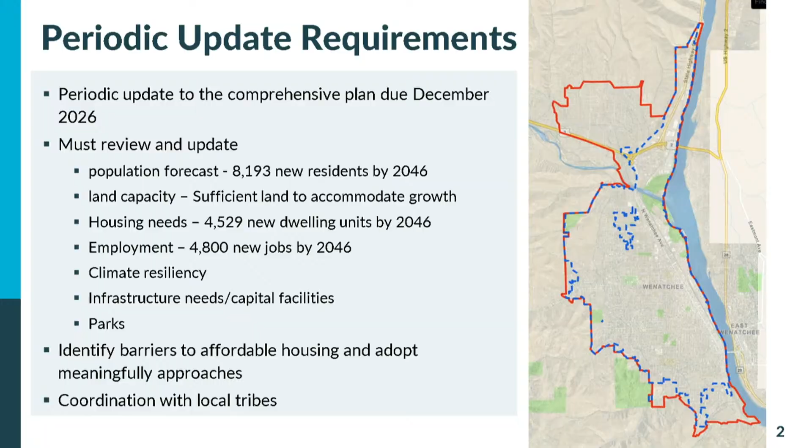We're also required to coordinate all these efforts with the tribes, and we're working towards that as well. We've been working since the beginning of last year on all of this, and we're currently in phase 3, drafting the comprehensive plan elements. We have a draft environmental impact statement that will go out in a couple of weeks, and we'll be holding an open house in May with those draft documents ready for public review. We'll continue going out to talk to folks and meet with you and the Planning Commission as we work through each of these.

At this point, I'm going to step aside and let Dave from Parks do his presentation, and then I'll come back and pick up the conversation on housing and other related issues. Thanks, Steve. You bet. All right.

Good evening, everybody. We're fortunate to have an adopted standalone plan, Parks, Recreation, and Open Space. It's 253 pages—I thought we'd go through all the pages tonight. We've got a couple hours, so lots of pictures, piece of cake. That was adopted in 2023, and by the end of this year we'll be about halfway through it, so we're able to incorporate a lot of that information into this comprehensive planning process.

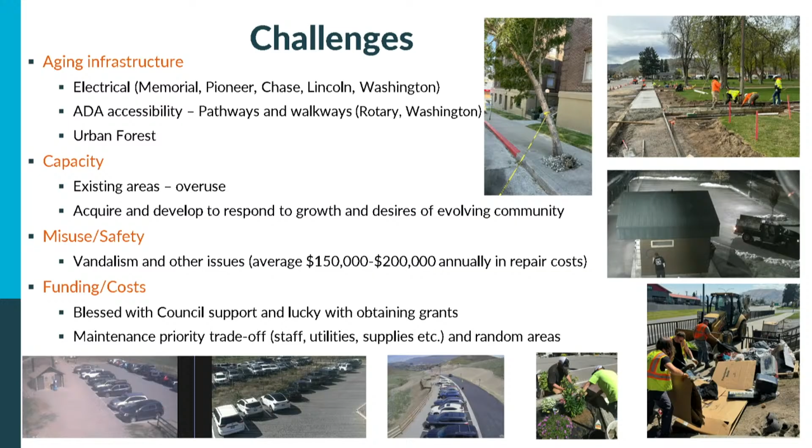And we'll cover that here a little bit. We may only have a certain amount of money and we have all these facilities we have to maintain. What are the priorities? Are we going to maintain the streetscape down Wenatchee Avenue, or are we going to maintain Lincoln Park, for example? But jumping into our PROS plan and ahead to chapter 4.

This chapter really talks about our assessment process. We looked at a variety of recently adopted plans when we developed this, and had a year's worth of meetings and surveys and did polls and trend analysis of what's happening out there, boiled all that down into the next section, which is the goals and objectives. But we did take a look at level of service and areas of deficiency.

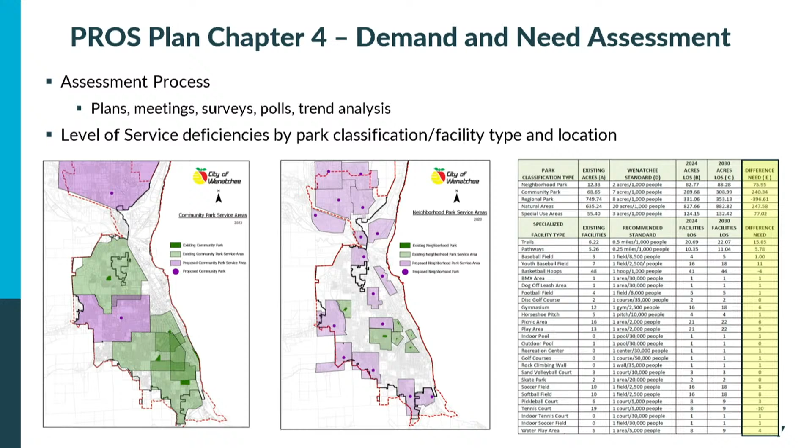And then it goes all the way down into specific facilities. That's the table on the right-hand side. So numbers of various types of facilities that would be contained within those parks to meet the growing demand as we move on into the future. You can see the 2030 need on each of those, and then the difference that we need to address.

Moving ahead to chapter 5, that's our goals and objectives. We call it the guiding framework. So it's goals, objectives, and strategic actions. Those goals are in five goal areas. This talks about climate resiliency, forestry, all that good stuff that Stephen mentioned is included in there. Forestry is in there as well, but broken out into those five areas.

Within those five areas, we have 24 objectives within each one. And then within those 24 objectives, there's 178 specific strategic actions to accomplish those goals and objectives. Those are the steps, and that could be anything like doing ADA accessibility at Pioneer Park, to the electrical at Memorial Park, to needing more picnic shelters or tables.

And then finally in chapter 6, this includes our capital investment plan, our capital plan. So all the projects, all 54 projects that are within the capital plan, have been rated on each of those criteria that you see there. Those criteria came about through the public input process, and those were the priorities that the community had. So health, safety, welfare in the park, that was kind of their number one priority, so that got a weight to it. Each project was scored and weighted based on those things to determine the actual list of priorities for our park projects.

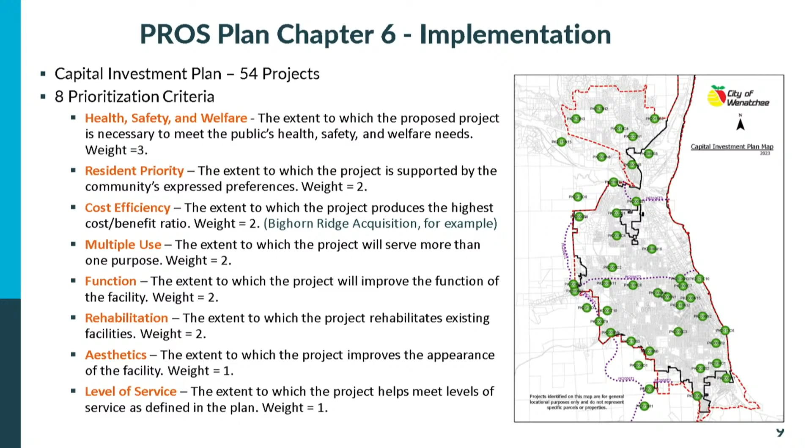Doesn't mean that we can't do a project, say that's ranked number 8 or 9, before you do project ranked number 1 or 2. If funding comes available for one of those lower projects, then that bumps up the list. That's kind of how that works. But it at least gives us kind of a roadmap of things that we want to try to accomplish.

And then also beyond the project cost, that's just dealing strictly with park stuff. We also have maintenance and operation to consider. We have formulas for maintaining and operating these parks based on the traditional park space you would see. Granted, some things take more maintenance than others - a splash pad takes more maintenance than an open field. So there are some factors that we do take a look at.

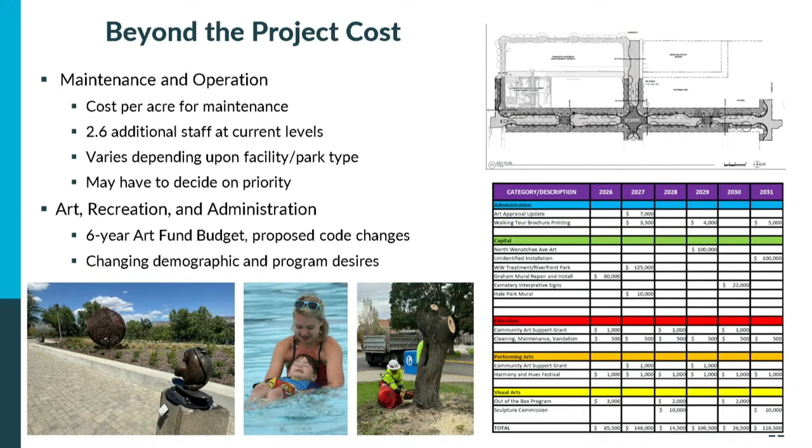Some of them, like Metropolitan Park District, we did some polling a couple of times. We did a conservation finance study twice over the last 5 to 10 years. The ballot measure polling did terribly - so bad that the group we did it with said they wouldn't even touch a ballot measure on this because it would fail miserably if brought out. What we did find is people love the parks, they love going to them, they want to have them, they just don't want to be taxed again for them.

Another one that stands out is impact fees - we have no development impact fees for parks. I've had those in a number of other communities I've worked in, or dedication requirements. So a big new housing development comes in, and in other places I've worked we said, depending on how many units you're putting in, you have to build and dedicate a park for the park system, then we take it on. It was a good way to get a park system developed.

But things like sales - the cemetery operates a lot on sales, mostly on sales. And then I've already mentioned grants and donations, partnerships. We do a lot with our partners on things to provide a variety of different offerings.

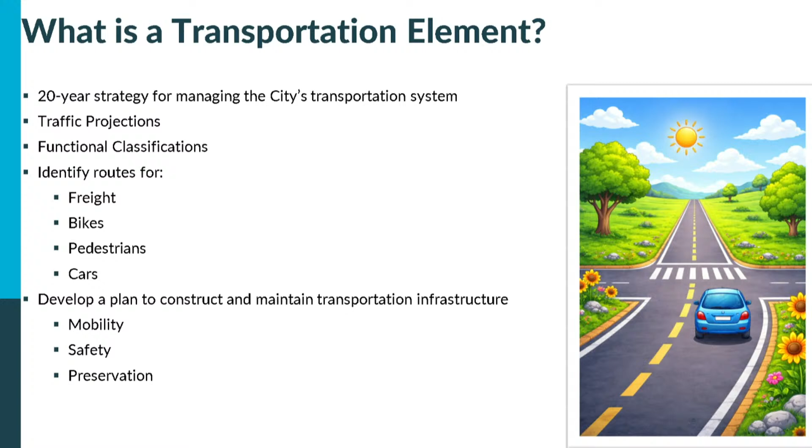The way we break up our capital program and our needs in this city is into three categories. You have mobility, which basically means a car can get where it needs to go in a certain amount of time, and our roads can serve all the vehicles that will be on them, big enough to serve them to the extent that city council decides they should be served.

You have safety, which is pretty self-explanatory. We ensure that we have a target zero policy at the city. You've all seen my wagon wheel, I love that thing. We are committed to zero serious injury collisions and fatal collisions in the city, and we're actively working to get there with our planning efforts.

And then preservation — this is depicting preservation of roads, but also preservation of ITS infrastructure, traffic lights, street lights, and stuff like that.

So I'll dive a little bit into the functional classification part of our comp plan update. This originally, what kind of started this about two years ago, was as we were having development come through and...

put buildings in, we kind of realized we have requirements around driveways, we have different requirements for different classified streets, and too frequently for my liking, we would have to have Jake make a city engineer informed decision about what the driveway situation would look like or what this or that would look like, because the roadway classifications were just a little outdated and growth had happened differently over the past 10, 20 years than when we first classified them.

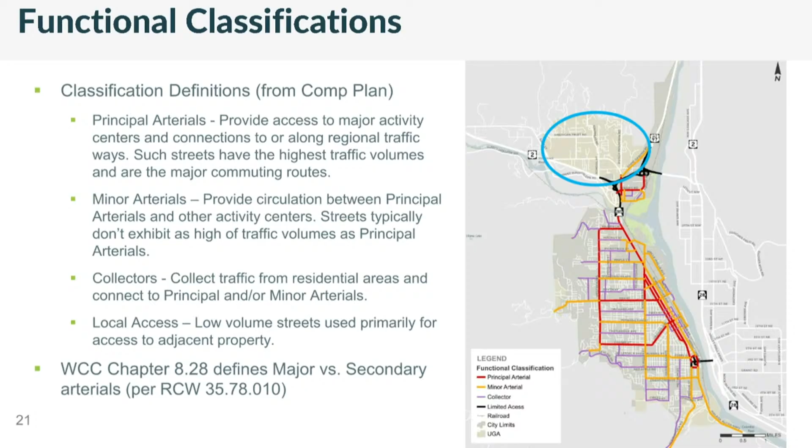We were pretty close. What we kind of identified is that a couple roads, specifically Western and Orondo, based on their traffic volumes and also the traffic projections 20 years down the road, there's an opportunity to look at how we look at them, and do we need to actually have them be a principal arterial, which is the highest level of road, or can we knock it down to a minor arterial?

That might come with a speed limit change, that might come with different requirements for lane widths. It's all stuff that we do this work with, keeping in mind what the downstream effects will be, and try to make a good decision.

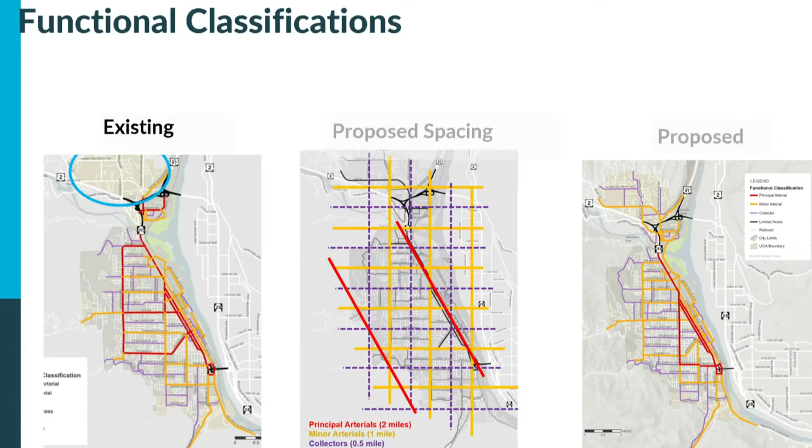So we're kind of at this stage now of reorganizing the roads in a way that makes sense based on data, like based on the volumes we're actually seeing. And hopefully support the future goals of development on some of those roads too, so. Right.

So the meat of what we wanted to talk to you guys about is level of service. I was trying to describe this to my mother the other day. And level of service is basically what degree of service you can expect from your roads, or from your bicycle facility, or from your sidewalks.

So as a city, we set the level of service. We set the quantitative and qualitative measure of what citizens can expect out of their roads.

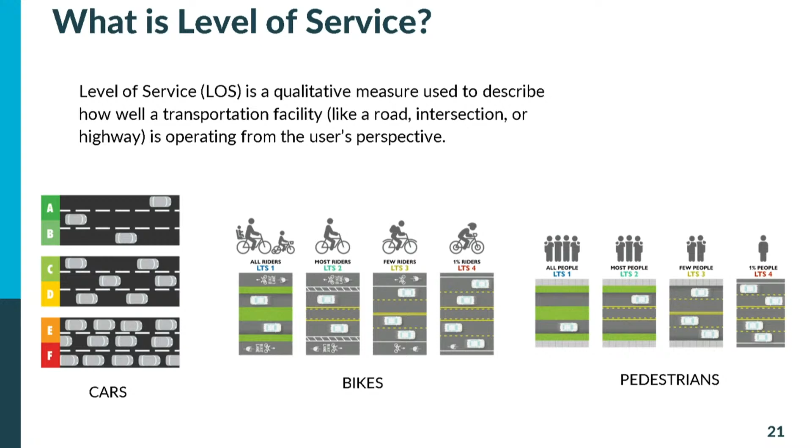When you have a higher level of service, an A, B, or C, the benefit is faster trips, you get home to your family sooner, which is wonderful. Other results are that you generally have to add more lanes or more pavement, which ups your pavement preservation costs. It also ups the encumbrance of a roadway facility onto the neighborhoods and the people whose front yards you're sometimes building lanes into.

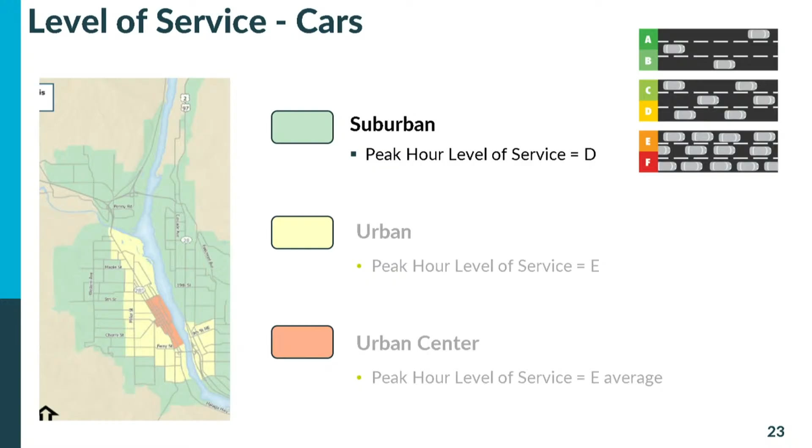There are alternate routes you can take within that downtown area if one block is choked up. Ideally, with an average of all the intersections across that core, there are available routes that are not failing yet.

So the next two types of level of service are a new part of the comp plan. This was recent legislation from Olympia that requires agencies of our size to have a threshold for level of service for bicycles and pedestrians as well.

This isn't new to us. We've been a complete streets city since 2016, planning for bikes and pedestrians and including bicycle facilities for a long time. The difference now is that it's measurable, which makes it more consistent for developers and for our group when reviewing.

So there are different levels. The way you quantify the level of service for bicycles is called level of traffic stress, or LTS. The idea is there are 4 different levels of traffic stress that you can feel when riding your bike on a road.

Level one tends to be your younger riders, families, and kiddos. Level of traffic stress 4 is your daily commuters, people who cycle to work every day and are very comfortable on the street - the speed helmet crowd, like Travis in full spandex, or Stephen Neuenschwander. These are people who aren't going to ride on the Confluence Loop Trail anyway, you know what I mean?

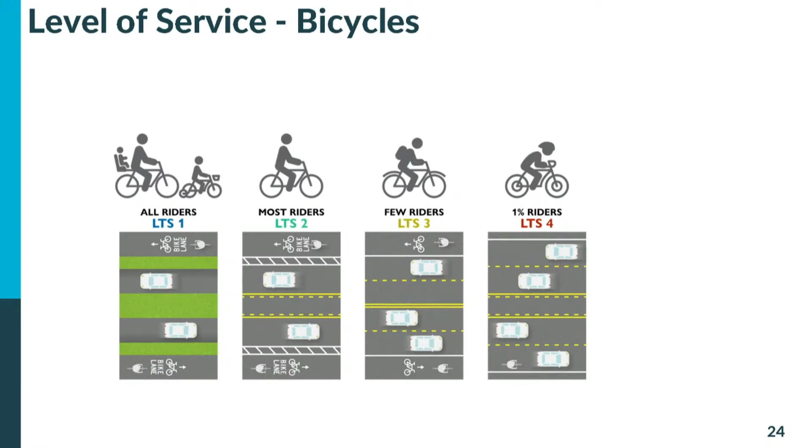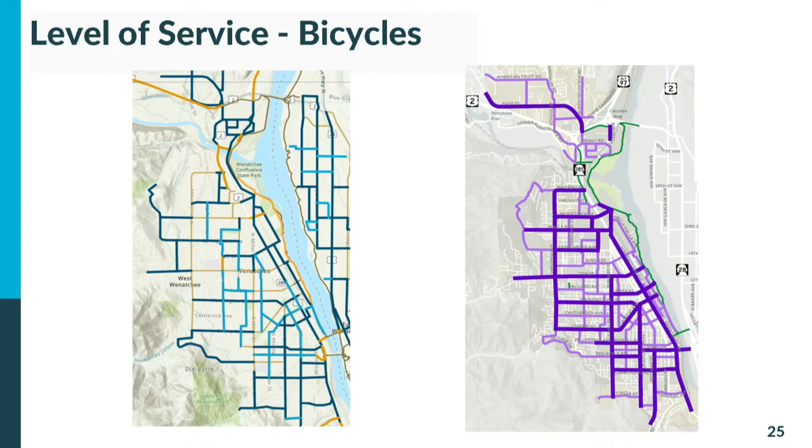The way we intend to look at it is on primary bike routes, we'd propose a level of traffic stress 2 or 3, depending on whether it's a principal or minor arterial, a collector, or a local street. This is where looking at our functional classification updates through this lens comes in - it's iterative, and we're going back and forth adjusting to make sure it works.

So essentially on these darker purple streets, the idea is that you would have a bike lane or a separated bike lane.

The way this is calculated in terms of level of traffic stress is actually an algorithm - it's mathematical, taking into account the speed limit and traffic volumes on the street. So it's not like everything in dark purple is going to have a non-separated bike lane - there's some nuance. This picture just shows what that looks like; it's a function of speed and volume.

As we looked at setting these level of traffic stress values for arterials and collectors, one of the things we did was look at the existing, or where our functionally classified arterials and collectors will be, and what the existing curb width was, to make sure what we set was forward compatible with those curbs. We're not committing to widening all the curb lines out an extra 10 feet, but ultimately this would fit on most of the existing roadway.

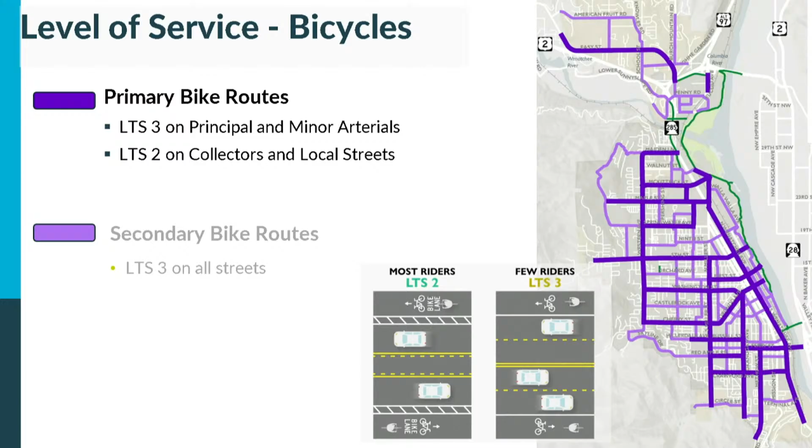We've been talking with the planning department about what our bike map looks like to ensure that we're not completely taking that away. For example, a lot of the routes classified as bike routes omit the non-classified roads, and the idea would be that parking would be available on those roads. So that's one strategy we're thinking about to mitigate that, but it's kind of why we're undergoing this effort together and not in silos.

Along with the trade-off mentioned, if you live on the residential road, maybe you can't park in front of your house because someone off of Cherry is now parking there instead.

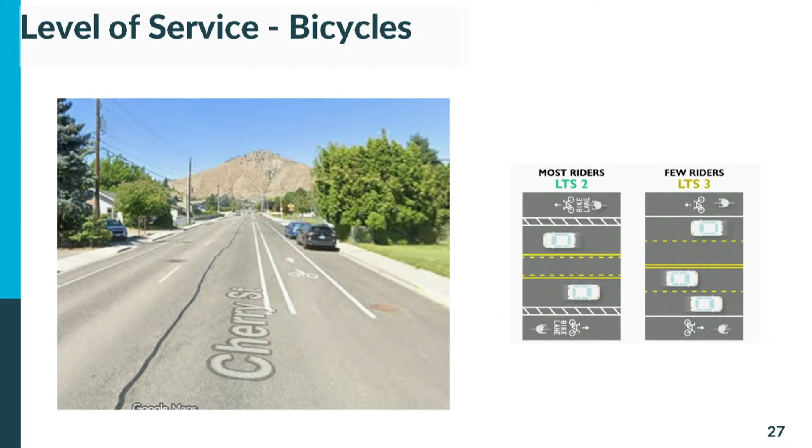Similar to bicycles, the level of service for pedestrians is based on comfort while you're on the facility. Level of traffic stress 1 is the easiest, most buffered, and ideally the kids and most vulnerable users could use a facility with level of traffic stress 1. Level of traffic stress 4, I'm not sure what the demographic difference would be, but it's just someone who won't wander into the road on accident, I suppose.

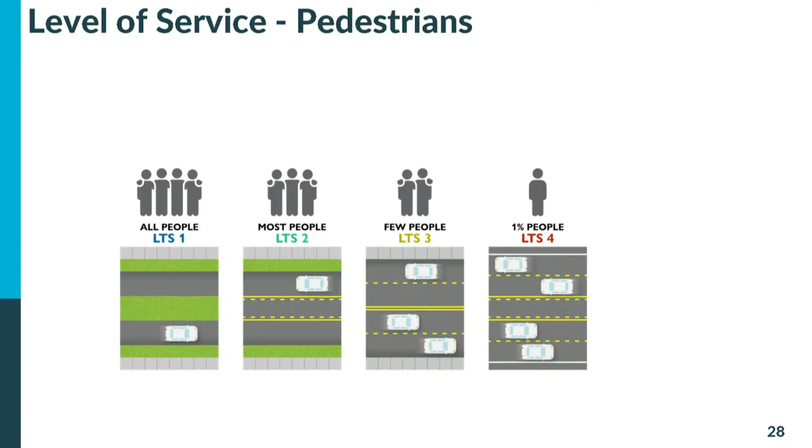Similar to bicycle facilities, we looked at pedestrian routes in the city. One of the loudest feedback we have gotten from the outreach is that people want sidewalks and pedestrian facilities, and they want to feel safe. So even though it might seem kind of silly to push for pedestrian facilities on some of these roads, it's certainly one of the most clear pieces of feedback we've gotten about our transportation network.

The ideal is to have an LTS2 for crosswalks throughout the city, meaning you have enough features, bells and whistles, and delineation at the crosswalk to ensure that the LTS2 is felt. Then LTS3 for pedestrians on principal and minor arterials. For secondary routes, same thing: LTS3 on all streets, and then LTS2 for crosswalks.

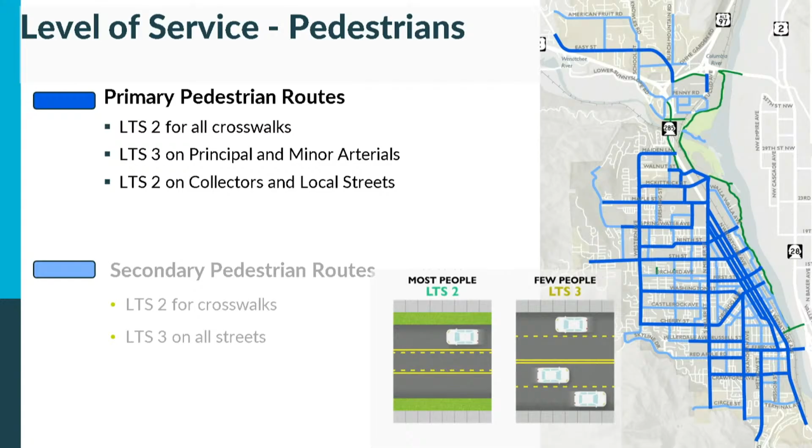Again, talking a little bit about trade-offs: as we enhance the walkability of the streets, we're going to start seeing more things like buffer strips, more pavement markings—it's going back to preservation. There are more things we are going to have to maintain that come at a cost. These enhanced crosswalks may include speed feedback signs, lighted flashing beacons, striping, and it'll continue to build with planter strips and things like that.

As staff, the plan itself will also identify next steps and action items for the city, including developing comprehensive funding strategies to go after this stuff, updating our codes to match the new MMLOS requirements, updating our development standards to ensure that they're provided for, and then also any associated city ordinances.

The biggest challenge we've been mindful of throughout this process is balancing the conflicting priorities between mobility and safety, because they're often in opposition. High levels of vehicle mobility conflict with density, growth, and infill. Pedestrian amenities can also conflict, because strategies allowing more ADUs and lifting frontage improvement requirements seem counterintuitive when you're adding density and people who need those facilities but don't have a car. There's also conflict between bike amenities and on-street parking.

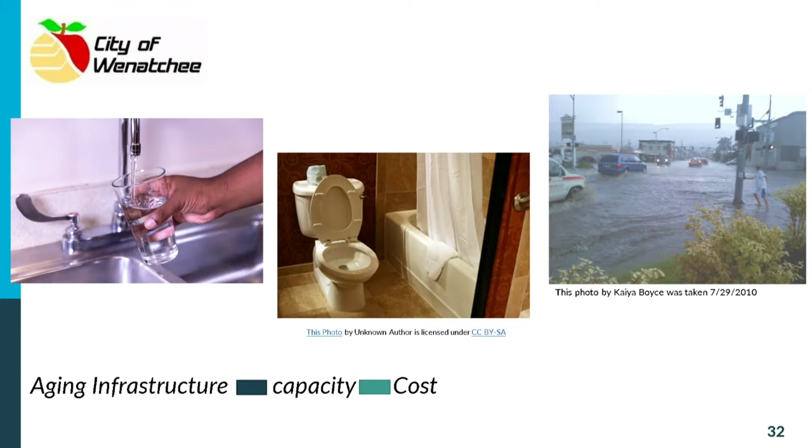So no surprises there. I'm just going to run really quickly through all 4 of our utilities. We break out regional as its own utility because it's its own funding, and we have a partnership with the PUD in East Wenatchee. But as you'll see tonight, all three things I talked about earlier, aging infrastructure, capacity, and cost, is affecting all of our utilities.

So right now, we only have one source of drinking water, that's the Eastbank Aquifer. That's a pretty cool picture of when we dredged and dug a hole across the river. Probably never able to do that again, but there we are.

So we have one transmission main, one source. Just over the last 2 years, you can see in '25, pump 1 failed, pump 2 failed in fall of '24. Thankfully, as of today, I'm happy to say both those pumps are operating at a much greater capacity than the old pump. So sleep better tonight, right?

And then pump 3 and 4, we're really working on being more proactive and good stewards of our utilities. We've already started work on replacing pump 3 and have plans to replace pump 4 in the next 2 to 3 years.

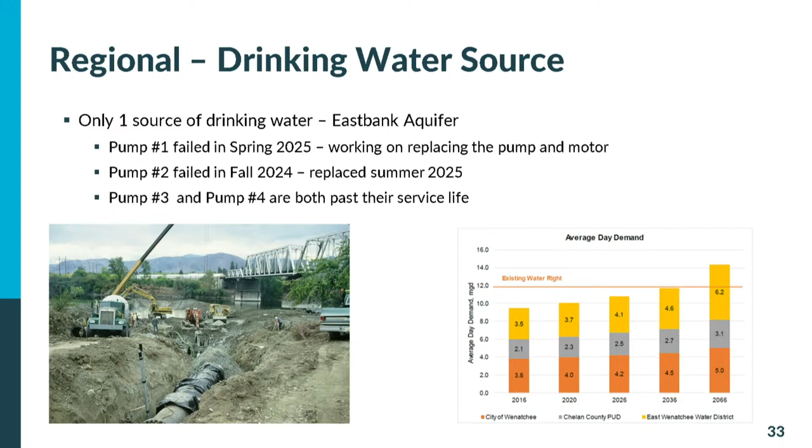The graph in the corner shows you that by 2036, we'll essentially be at capacity at our Eastbank Aquifer, which means we need to do a lot of work to accommodate growth in our community. And it's not just our growth, it's growth in East Wenatchee, growth in Chelan PUD, so it's an even bigger issue. As we've seen, usually we've always thought that our growth projections were pretty conservative, but

that's because we didn't take into account the impact of middle housing. So unfortunately, our planning efforts were done out of sync with some of the comp planning efforts in the past, and regulations have changed at the state level. I'm super excited about the efforts that the planning department is doing and our collaborative efforts. I just feel like we're doing a better job of planning and coordinating efforts, and it's really exciting to be part of the process.

So some of the upcoming current projects I'm working on: we are planning on developing a new well field in Douglas County. We're also planning on developing a new source, which will likely be a surface water treatment plant. You can see on the right, it's basically a giant LifeStraw factory to filter all the water.

There's a map of the service area that we currently provide water for. It goes clear out to Monitor, way out to, from Baker Flats, clear out to the airport, and then all the way up Forest Ridge. So quite a large area that regional water provides water for, all areas that are growing, right?

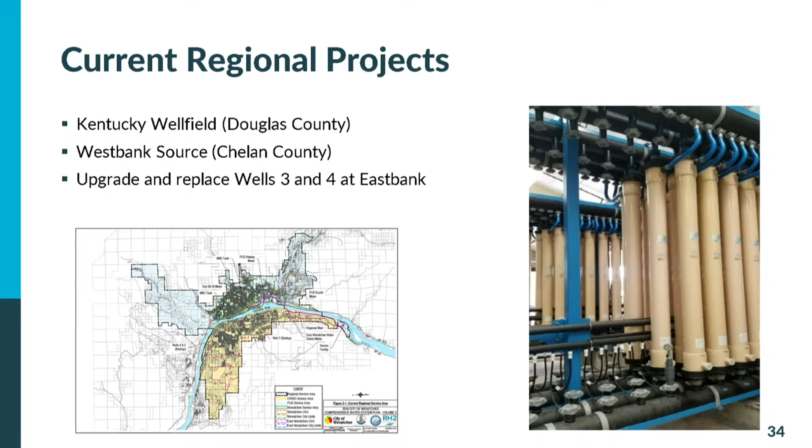This is our cake analogy in the utility. We're the hidden cake under the road that when it goes wrong, everybody notices, right? But yet we have all this infrastructure under the ground.

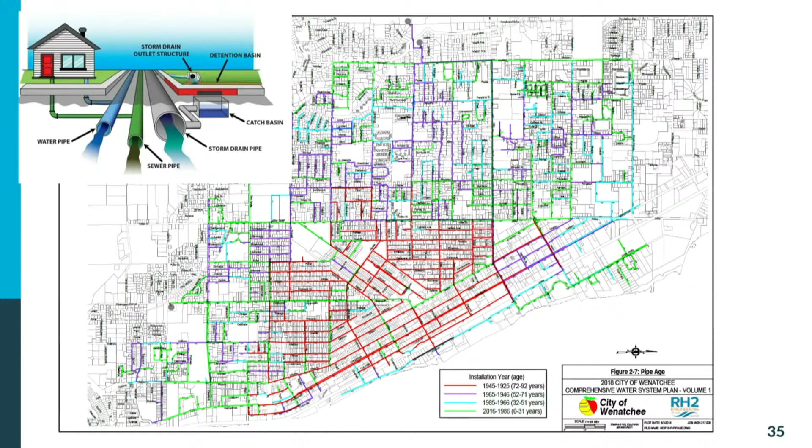If you guys remember, December was a pretty rough month for us, and we continue to see increasing leakage. My focus with projects is really, we'll get to the projects.

We also have, this is a great picture from December. In December we had multiple leaks, several serious ones, like this one in front of Lifeline. My biggest concern with these leaks downtown is we're impacting businesses, so it's even a greater cost because we're having to ask businesses to close while we repair things. Our crew did an amazing job, but we're not always able to get things repaired that quickly. It's also a bit heartbreaking when we flood businesses, because now they pretty much have to shift to recovery, and it gets tough.

So some of the projects we're working on now, we've really focused in on what are the key things our community needs to continue moving forward, and what is most likely to fail next. Now we do have to make a bit of guesses, but we're looking at data like how many times have we had to go out and fix that main, and what are the impacts if it totally fails.

That's why we have the Crawford water main on our list, because Crawford serves the hospital. It's very old, it goes under the canal, it's mostly repair bands up to the canal. So we felt like if that main failed, it's going to have a huge impact on our community.

Of course the Okanogan Reservoir, you're familiar, that failed last fall. We're working on doing some temporary repairs, but are hoping to move forward with continuing to replace that, because without that Okanogan Reservoir, we're really hamstrung with growth. We won't have enough storage for fire protection and to supply water for adding more housing.

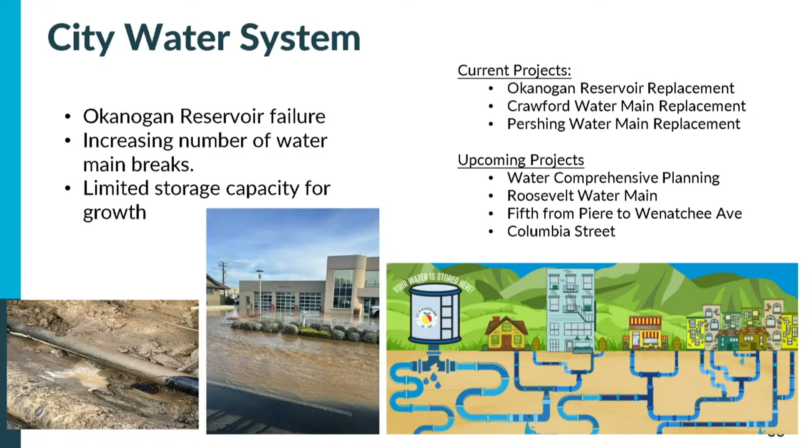And hopefully you've seen our Fix a Leak Week that's kind of helping people understand the importance of not only our infrastructure in the road, all the pipes, but also our storage tanks.

For sewer collections, as you may recall, again we're seeing some infrastructure fail.

Man, that pipe in Olds Station, our force main, you can see the area it served. We pretty much had to ask people to please don't flush or limit your discharges as much as possible. We got that fixed, another amazing job by our crews with help from lots of partners, Douglas County, Chelan County, PUD, everybody that jumped in to help with that. But again, you see what it does to our roads, we end up blowing up over half the road. And that pipe actually wasn't that old, it was from the 90s. So just an unfortunate thing, but again, we have a lot of old infrastructure.

I love this picture of the 115-year-old cobblestone manhole. This is actually the manhole on Kittitas Street that the Majestic tied into. And you can see in the other picture what a newer manhole from the 90s looks like, it's a concrete structure sticking out of the ground there.

So current projects with our sewer collections, big shout out to our collections crew. They are doing pipelining projects and more small works projects. Essentially, that's in the upper corner there, the purple, it's like putting a brand new pipe in there without losing the capacity. Not only are we able to do that really affordably because we don't have to dig up the whole road, it's helping to buy years on those 100-year-old pipes and preventing sewer backups, because when the pipes start to collapse and fail, that's when it causes backups into people's homes.

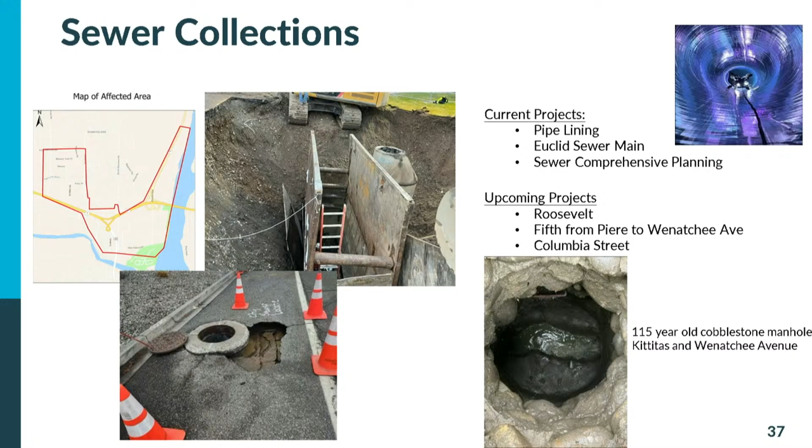Upcoming projects, again, you'll notice these are all the same projects that were in the water plan, and that's because we're also working hard on trying to be really efficient with those utility dollars across all of the utilities. So it's a work in progress.

So onto our wastewater treatment plant. The digester with the brown chocolate fountain running down the side, as Mike likes to call it, that one was born in 1951. It's essentially obviously having some aging issues, and we did get it fixed. There is the other photo of our brand new digester 4, which came online in 2025. Unfortunately, during current facilities planning, we learned that that new digester, in fact all of our digesters, reached capacity last summer. So that's why we're working really hard on this next phase of digester improvements, to be able to expand the capacity of our solids handling.

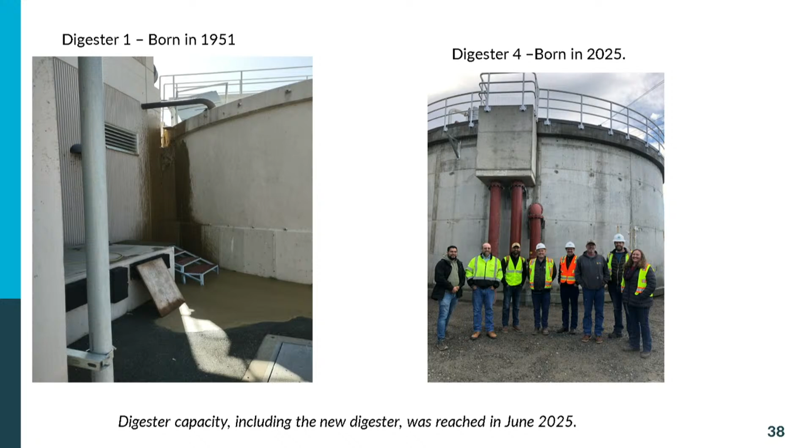So in the nick of time, did we get that fourth digester? Oh, live action, oh did you want to see that? Live action, wow, oops, come on. Oh well, I can send it to you. It's really great, just imagine a chocolate fountain, but it's not chocolate.

So wastewater treatment plant projects. On the right is our wastewater treatment plant, we actually have property on both sides of the street. Our current projects, as you know from last council meeting, we're building a new admin building. We are also adding a fertilizer storage building, which is super exciting, because with that project we're going to transition from having to pay to get rid of our biosolids to having people pay us. So that's just part of some of our industrial symbiosis efforts to increase the efficiency of our utilities, which I hope someday will continue to pay off and help control some cost increases.

Can council be first customers? Yeah, of course. How much do you want? Do we get to decide on a name? We usually produce about 600 tons, so let me know when you're selling it, how much we can buy.

First customer. All right, no problem. We still need to work on a name for our project, so don't worry, we'll be back.

We just need to build the storage building first.

Some of our failing equipment at the plant is our primary clarifier mechanism. It's leaning, it should be straight up. We have it held up with ratchet straps right now, but it's hanging in there. We have all the parts, we're just trying to get time to get that going.

Also, the south viewing area, hopefully you've noticed, it's a little bit prettier down there, and don't worry, it'll get prettier as we go along. That actually is some of the final repairs for the primary effluent line break that we had a couple of years ago, so finally getting things put back together.

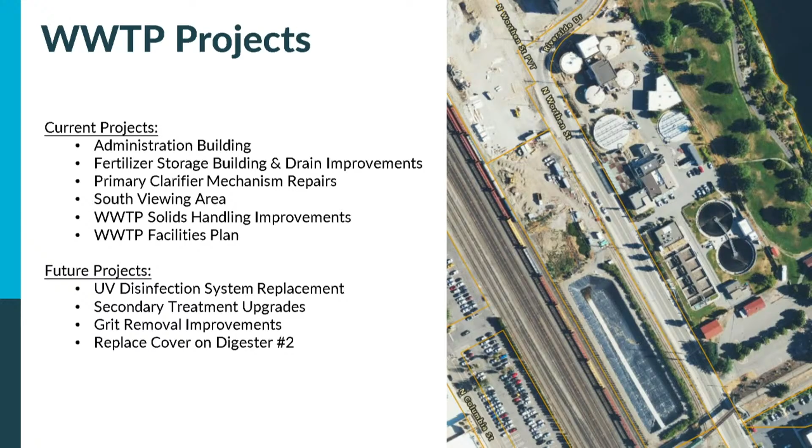So again, balancing supporting growth, but also dealing with some aging infrastructure. We like to say we're always shuffling the deck to figure out what's the next most important thing to be working on based on where we're at and where we're going.

And stormwater, as you may remember, the pipe inside there was pretty ratty and broken down. That was our emergency repair at 5th Street from Emerson to Chelan. That stormwater pipe, a lot of it's from the 60s, 70s, 80s. It just hasn't lasted in our soil.

So a lot of it is this corrugated metal pipe, and you can see the black part, that's the asphalt lining, but once that gets ripped out, this pipe just eats it up very quickly.

And then the picture in the middle is out there on Miller Street. Our stormwater system was really designed for like a Seattle rain event, nice and slow, all day long, 24 hours, which isn't bad, it keeps our facilities from being too big. But what we've seen trending lately is that these rain events are more intense and over a shorter period of time, so our infrastructure just can't keep up with it.

So one of the things we've been doing is this, our 9th Street project. It actually won 2 awards this year, a national award from StormCon for its innovation and environmental impact, and an award from the American Council of Engineering Companies as one of the outstanding projects for its innovation and creativity.

So this project is super cool. We built this huge underground infiltration structure because we had huge capacity issues on 9th Street, but we didn't want to do the whole pipe down 9th Street to make it bigger.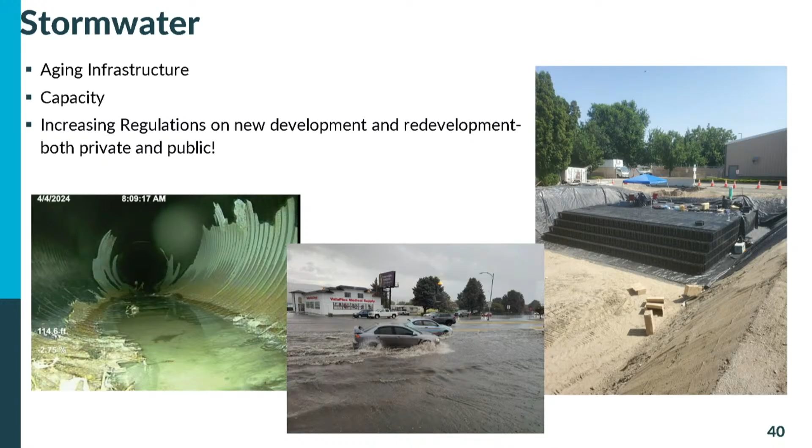The one thing I do want to mention about stormwater is that all the utilities are highly regulated. We have new regulations coming down starting in 2027, and it's going to increase the cost, especially for developing smaller projects - ADUs, multifamily, smaller duplexes - that'll be impacted and have to provide on-site infiltration and water quality treatment. What used to be an acre is now down to 5,000 square feet of new or replaced hard surfaces, so that means the roof - it's not just pollutant generating surfaces, it's all the surfaces. I'm not sure how we address that other than trying to figure out some creative ways to help development meet those new requirements.

I'm happy to answer any questions you have.

It's just interesting, we have all these state requirements, and there's the CHIP program. I know somebody here actually benefited from the CHIP program - yay - to help us, but there's very little financial help, we have to take the whole responsibility.

Yeah. And so you guys are stuck to figure out how are we supposed to figure this out, right? And somehow you have to say we are trying, because we're mandated to come up with a plan to try, but it's not realistic. It's like one department doesn't know what the other department over there is doing.